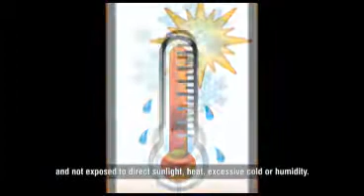Recommendations and precautions. To select an appropriate site to install the Eternity PE system: the site should be well ventilated, moisture and dust free, and not exposed to direct sunlight, heat, excessive cold or humidity. The site should be at equal distance from all the extensions to simplify the cabling network and reduce cabling costs. For easy preventive and corrective tasks, you should install the system at a height of at least 3.5 feet from the ground.

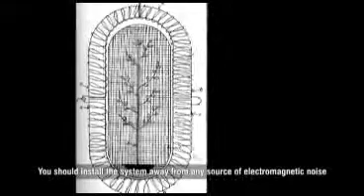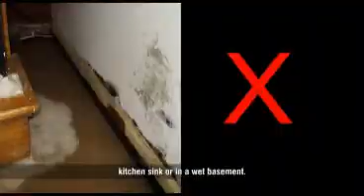You should install the system away from any source of electromagnetic noise such as radio equipment, heavy transformers, etc. Never place the system near a water source like a wash bowl, kitchen sink, or in a wet basement. Select a site which is free from dust, oil, corrosive fumes, etc. Avoid a place near high-frequency generating devices such as an electric welder or microwave oven.

The Eternity PE system works with input voltage ranging from 100 to 240 volt AC. The input voltage is to be isolated from other heavy electrical loads like air conditioners, motors, etc. Proper earthing protects the system from lightning strikes, static discharges, electrical transients, and any other electrical hazards. So you should always provide a dedicated telecom earth to the PBX and other telecom equipment.

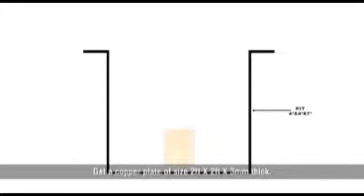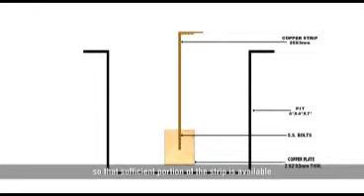There are many ways of providing telecom earth. One of the ways is this. Select the location of the earth pit. Dig a pit of 4 feet length by 4 feet breadth by 7 feet depth. Get a copper plate of size 2 feet by 2 feet by 3 mm thick. Connect a copper strip of 25 mm by 3 mm at the center of the copper plate with SS bolts to run the earth wire or cable. This copper strip should be of sufficient length so that a sufficient portion of the strip is available to connect the earth wire at the ground level.

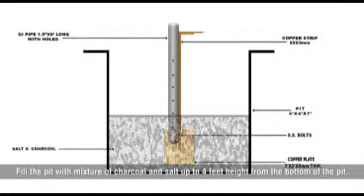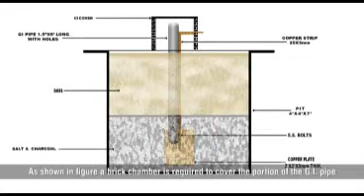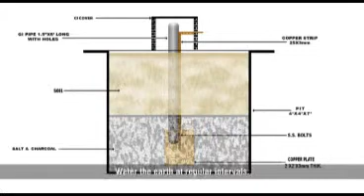Attach a galvanized iron pipe to the copper plate with SS bolts. This pipe is required for watering the earth pit in future. Fill the pit with a mixture of charcoal and salt up to 4 feet height from the bottom of the pit. Fill the remaining portion of the earth pit with black soil. As shown in the figure, a brick chamber is required to cover the portion of the GI pipe coming out from the earth pit above ground level. This chamber must have a cover which will prevent foreign bodies and debris from entering the chamber and further the earth pit. Water the earth at regular intervals.

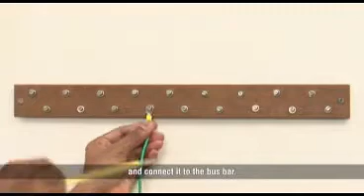Connect industrial standard multi-core 4 square mm cable on the top of the copper strip and connect it to the bus bar. A bus bar is a copper strip with screws and nuts mounted on it. It should be fixed on a wall in the room where the system is mounted.